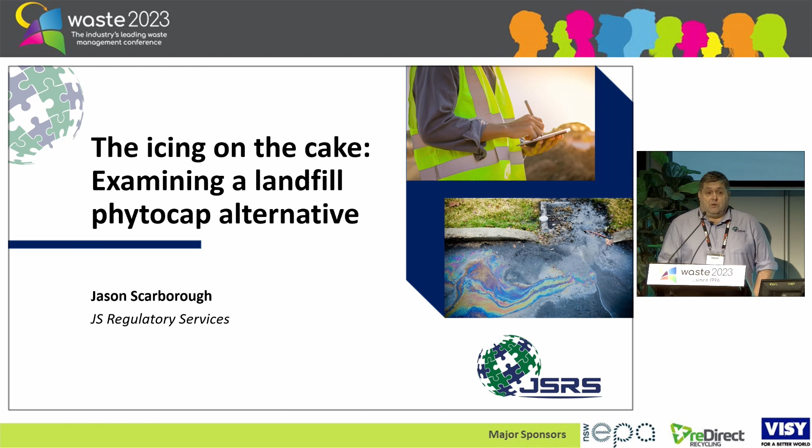There we go. All right, back to the business at hand. I'm talking about a phytocap trial that was undertaken with Mid-Western Regional Council. For those of you new to the game or wondering what the hell a cap is to begin with, let's start from first principles.

If we're talking about your average cross-section of a landfill, it sort of looks something like that. A lot of time and attention is often paid to the liner system. Then when the facility's about full, people go, holy crap, we've got to put something on top of this now. And there's usually a mad rush to design and finish off the landfill site while starting either a new cell or a new site.

Now, where it gets interesting: phytocap. Some of you might be thinking, a whooby whatty. Look, a phytocap is like what you would call a conventional cap, but it incorporates vegetation into the mechanism for its operation. It intercepts rainfall as it falls on the cap, and moisture gets sucked out of the cap underneath by the plants, and there's also water storage actually in the soil layer. So it operates by a slightly different principle compared to conventional caps.

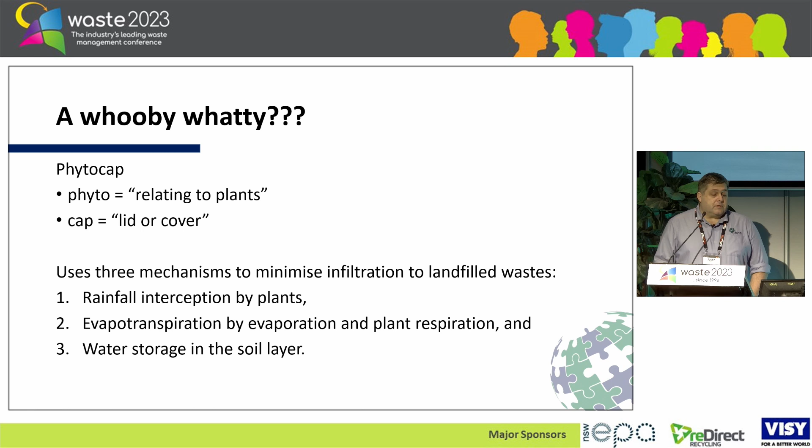If you put the two side by side, it looks something like this. If you follow the New South Wales landfill guidance, you end up with something that can have up to 7 layers of materials stacked on top of each other, so it can become quite a complex engineering undertaking. You put a phytocap next to it, that's pretty much it - 3 layers of stuff. So from a construction perspective straight away, you can see some advantages there. There's also some performance advantages, and operation and maintenance advantages as well. It definitely has merit when you stack them side by side to a conventional landfill cap.

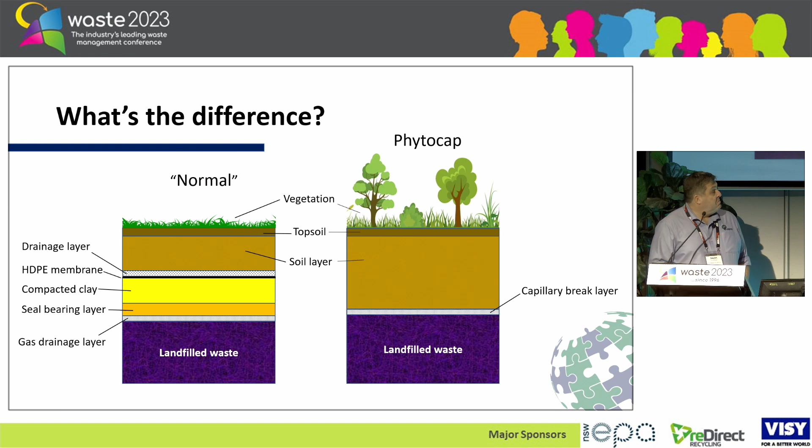So you're probably thinking, well, if they're so good, why aren't they everywhere? I've done some careful research into this topic, and I thought maybe the difference is in the 2 pathways to get approval for a normal cap versus a phytocap. If you're going down the road of getting approval for a normal cap, you go to the landfill guidelines, you go have a chat to some engineers, they come up with a design, you go to the EPA, and if they say okay, you build it. Sounds simple enough, but anyone that's been through that journey can tell you that can be arduous, that can be a tough road.

For a phytocap, I think this is where the difference lies as to why they're not everywhere.

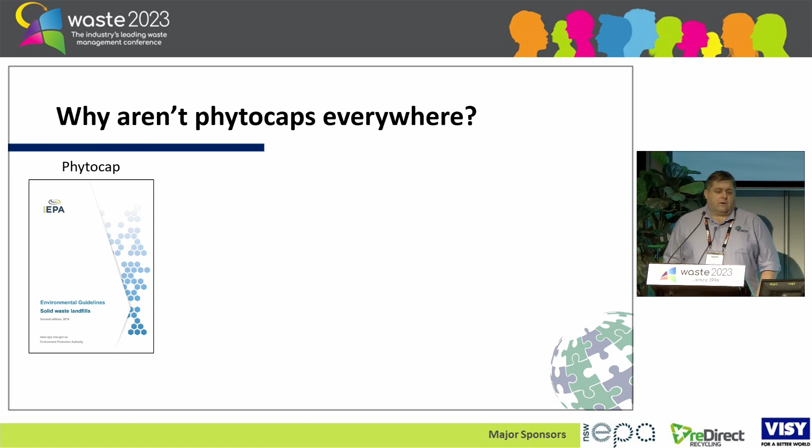You start in the landfill guidelines, good start, and they point you to another set of guidelines, which tell you to get a whole heap of data and feed that data into a computer model. Out of that computer model, you get a profile design. Then you go to the EPA and say, hey, we want to trial this profile design. They say, go away and trial that for 3 years. Then you go back into the computer with the trial results and ask, how did we go? Do we need to modify the design? Yes, we do. Okay, go back to the EPA with the trial results and a modified design. Then you go to the engineer and you can build it. I think that's why they're a little bit trickier to get off the ground. Just a hunch.

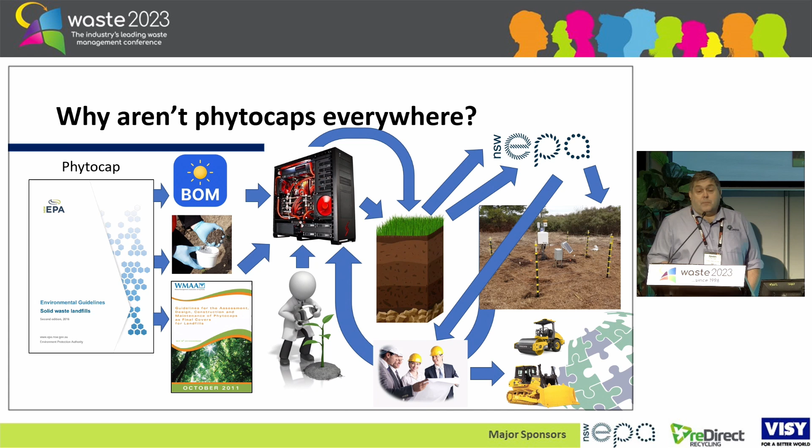But anyway, this is where Mid-Western Council comes into the picture here with the Mudgee Waste Facility. It's not a spectacularly unique regional waste facility, it's fairly typical for a mid to large size regional centre. They're looking to close off their landfill, and there are some challenges to building a conventional cap on this site.

So they said, hey, let's have a look at doing a phytocap.

We started off by having a look at the soil that's on site, and straight away we could tell, looking at the analysis of the soil, it's not suitable for a compacted clay liner, but it's potentially suitable for a phytocap, and they've got lots of it. They've got it coming out of their ears, so they're a bit fortunate for a regional waste facility. They've got quite a large amount of potentially suitable material.

Oh, and by the way, before monsters go to bed at night, they check under their bed for Chuck Norris. Sorry, there's so many good jokes, I just didn't want to waste them. Anyway.

Okay, so we started off the trial and said, okay, what goals do we need to set? We looked at 2 goals in particular. One is specified in the guidance, where it says that the infiltration through the cap has to be less than 5% of the annual rainfall. Those figures on the slide are about what we were looking at for this facility. The second, obviously the big one, is it less resource intensive than building a conventional cap? So those are the 2 things we needed to tick off to say this is worth looking at.

So then the next step in the process, we dived into the numerical modelling. In this case, I used a model called WAVES, developed by the CSIRO, very smart cookies there. It simulates the complex interactions between atmosphere, soil, and vegetation, but they need to do a bit of work on their user interface and user experience. It's DOS-based, can you believe that? It's 2023, guys. But it still provides credible results.

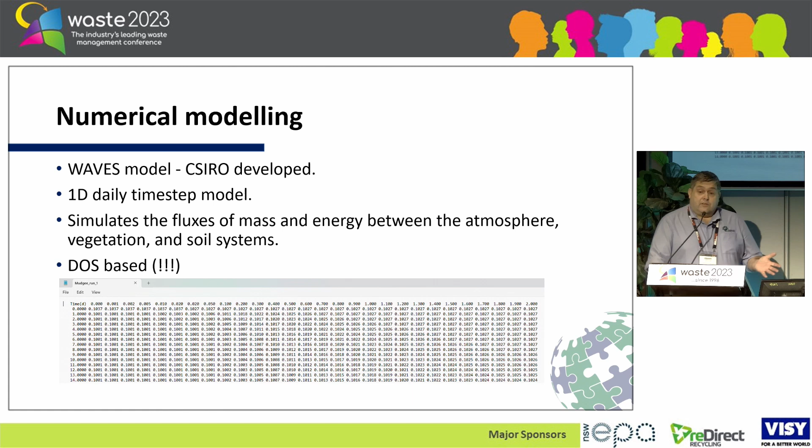Out of that numerical modelling, we got this. It was conservatively designed to work from day one, so it wasn't dependent upon the vegetation being established to actually operate effectively. In total, 1,600 millimetres of cap with 100 millimetres of what's called a capillary break, to stop moisture being sucked out of the waste mass into the actual phytocap.

So we did that, we went to the EPA and said, hey, what do you reckon? They said, yeah, go away and test it. And that's exactly what we did. We set up about a 1,200 square metre trial plot using that soil profile, put in soil moisture probes, put in lysimeters, put in an automated weather station, and because it's the 2020s, we put in a system that could be accessed online at any time to download the data, view the data, have alerts sent, and all the rest.

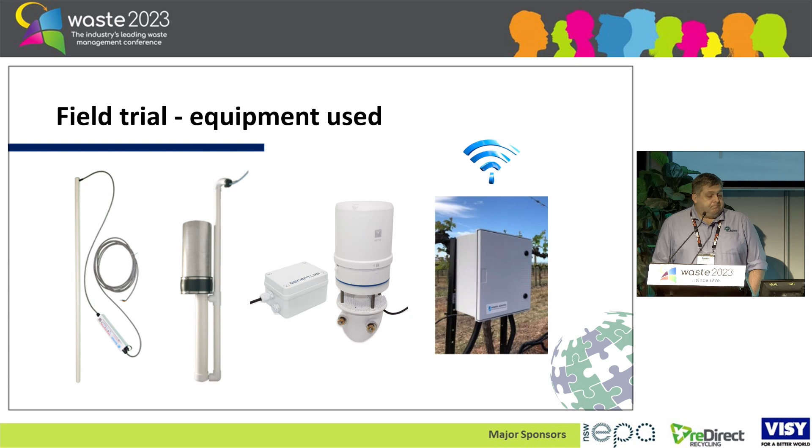And what did we measure? Well, essentially everything we could, because my philosophy is that you can never have too much data. So at the end of a 12-month period, there was over 3 million data points that we could look at. Now, don't worry, I'm not going to go through them one by one and bore you to tears, but I will pull out some of the significant findings, which I think are of specific relevance here.

We picked a good year to trial this. Apparently it was the 6th wettest 12 months since records began in Mudgee. So if we're going to give it a trial by, well, I was going to say trial by fire, trial by water, this was definitely it.

And in amongst that, there was about a 1 to 2% AEP storm, a 48-hour storm in the middle of that. So we put it through its paces, and there were some interesting findings, and these are the three I'll talk about primarily.

We noticed something called what I'm calling a moisture wobble in the soil profile. The response to that storm was actually quite surprising, and there was some inconsistency between the lysimeters and the moisture probes. So if I bring up the moisture profile first, we'll deal with that.

But we'll come back to that.

This is the storm event I was talking about, that quite intense storm event. Each data point is taken every 15 minutes, so you can see there was quite a lengthy period where there was 6, 10, 16 millimetres of rain falling every 15 minutes. The yellow line above it is the soil moisture at 0.75 metres below ground level, and you can see it increased by a whopping 0.7%. That was the furthest down the profile that this storm event impacted in the phytocap.

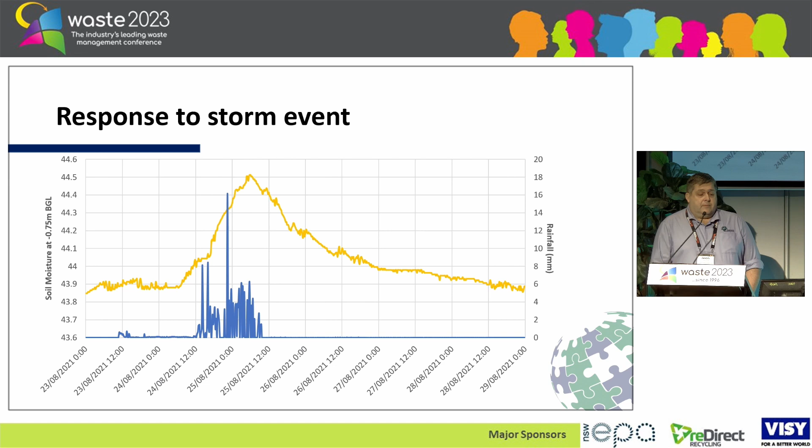And then having a look at the moisture probes, again lining up against rainfall events, there was very little variation in the actual soil moisture identified as well. So we're thinking, well, where's this water that's ending up in the lysimeter coming from if we can't see a progression through the soil profile?

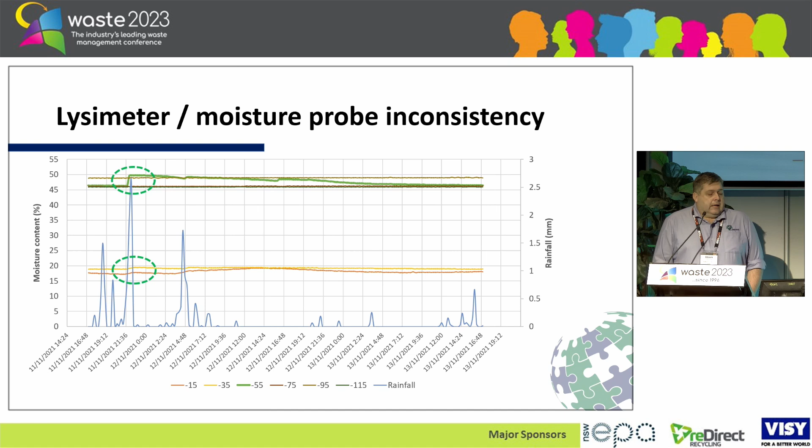So we got to an interesting situation where, if we just looked at the lysimeter data, it fails the first goal I mentioned before about achieving that infiltration. But if we just looked at the moisture probe data, it passed with flying colours. So there's this questionable relationship going on - we can't see that deep migration of moisture, that whopping great big storm event didn't penetrate the full depth of the cap, and then that moisture wobble I talked about. We thought, okay, something else is definitely happening here.

So this is where the benefit of lots of data can come in, because we're able to pull it apart and look at correlations between various things. And we've come up with a theory that we think might explain it, and it might have implications for future phytocap design as well.

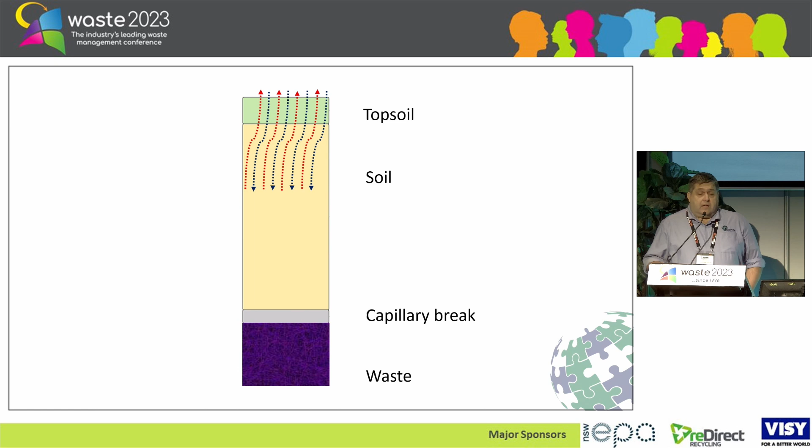So basically, this is the principle that phytocaps work on: water in, water out at the top. We can model that, we can measure that, not a problem. The thing is we've got this other process happening underneath, where organics in landfill waste are breaking down, and when they do that they obviously create landfill gas and heat. Again, delving into the data, looking at temperature down the profile, it's definitely getting hotter the further down we go. That makes sense.

So the theory being is that, if anyone's done landfill gas extraction before, they'll tell you that landfill gas comes out humid, quite saturated with water vapour. So we're thinking perhaps there's water vapour being conveyed from the waste into the bottom levels of the phytocap. Does that explain why it's coming out the other end?

Well, it sort of does, because when rain falls, the weight of the cap above it increases, because it obviously absorbs water, and that increases the vertical stress in that soil column, applying pressure, a bit like a sponge. Out it comes, okay?

So what we think the data is telling us is that there's this cycle going on at the bottom of the phytocap, round and round it goes. It's not new moisture, it's moisture coming out of the landfill waste, being squeezed out again, coming back up as water vapour.

So it might mean that the bottom couple of hundred millimetres of the phytocap shouldn't actually be factored into it working as a phytocap, because that layer could always be saturated from water vapour coming from the waste.

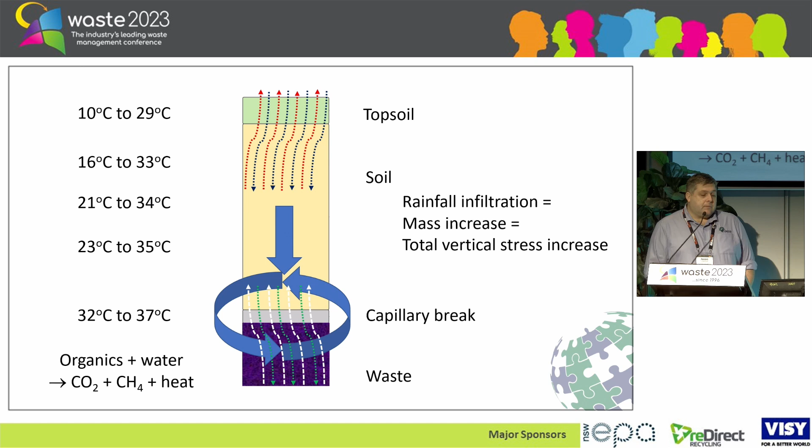Importantly, this isn't modelled. I've scoured everywhere to see if there's a model that could describe or attempt to replicate this process, and I haven't been able to find one. So there's a bit of an unknown in terms of how that bottom couple of hundred millimetres of a phytocap works.

So that's probably a good reason why you should be looking at conservative design.

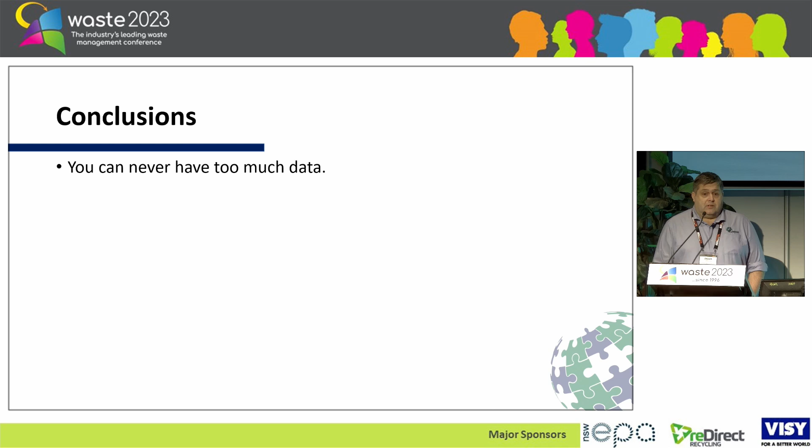Conclusions we came to at the end of the project: you can never have too much data, it's something I live by. If you can collect a couple more parameters at tighter time intervals, it's worth it. You can never have too much of it, and when you get apparently contradicting results, that's where it really comes into its own.

Phytocaps do need to be conservative to accommodate for that moisture flux at the bottom of the phytocap. You might have to discount the bottom couple of hundred millimetres from the action of how it actually works. Definitely more research is required as to what the effects of that are, and hopefully someone clever can come up with a model that might replicate that in some form.

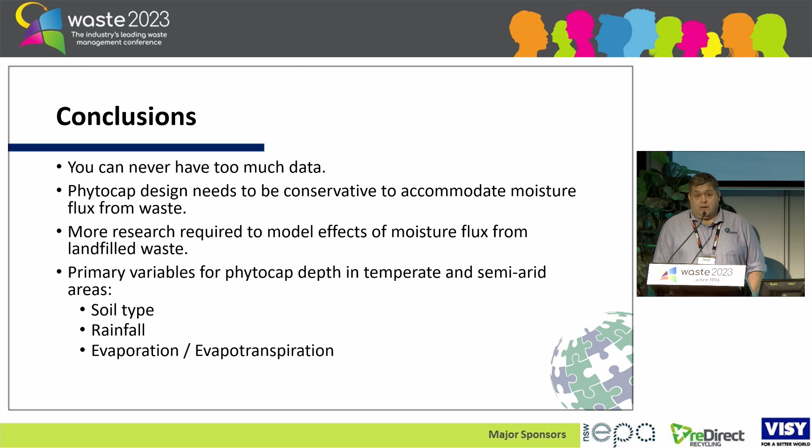And lastly, this is the message for everyone with an active landfill site in the room: if you've got the right soil type, the main variables you're looking at now for suitability of a phytocap are how much rainfall you're getting and how much evaporation or evapotranspiration you can get.

But that doesn't mean it can't work outside of those areas.

Looks like Chuck's having the last say. Well, yes, okay. That's it for me, thank you.

But I do want to acknowledge Mid-Western Regional Council, who were brave enough to go through that twisty, turny approvals path I showed before, and in particular Kylie Stewart and Amber Twin, who have been instrumental in getting this work done. Thank you.

Is it? Where was the hand?

So very much like the talk we've just had, this is different processes of landfills. I do like phytocaps, by the way, I'm going to say that, even though this is going to go against it a little bit.

This is about evolution of landfill. Just very quickly, a little bit about our company, if you don't know us. We're a lining company, we're a materials supplier. We have to source 99% of our materials from overseas because there's fundamentally no manufacturing in Australia anymore. Pretty sad, but it's a reality of what it is. There's only a couple of things made here.

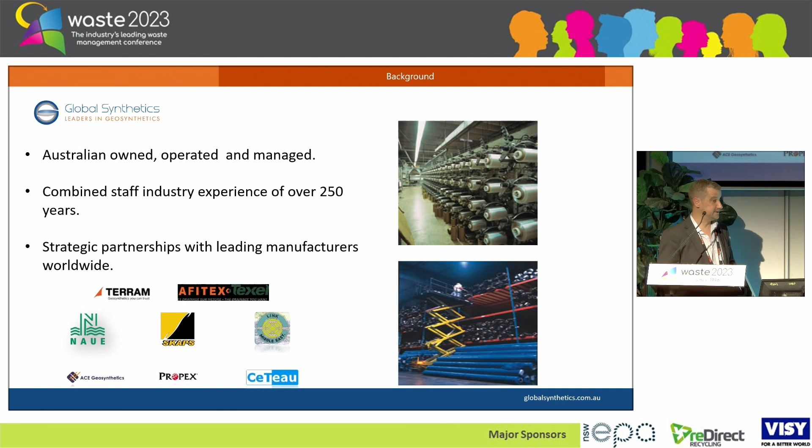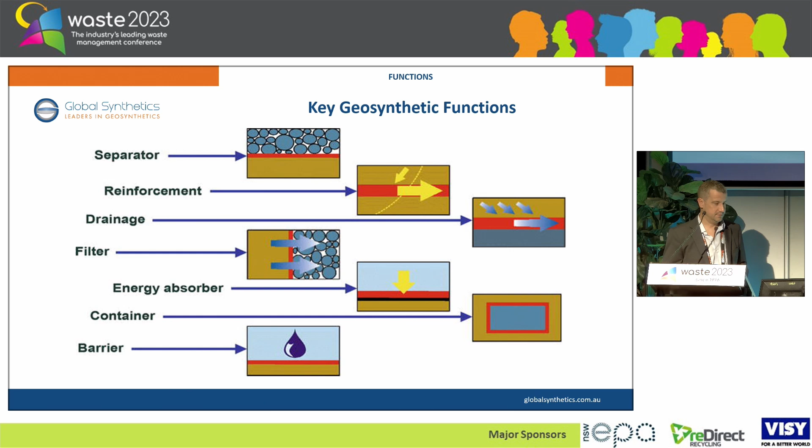And it's all geosynthetics. If you're not aware, geosynthetics is really broad. It goes into lots and lots of different things. You've got geotextiles, a lot of people know, HDPE liners, geosynthetic clay liners, but it goes way beyond into coastal erosion, all sorts. But as wide as it is, it all sits under these fundamental categories: it separates something, it reinforces it, provides drainage, filters, containment, which is a big thing in landfill, and barriers. And this gives you a snapshot of all the different applications we go into.

So, the matter at hand, landfill. Back in around about the 1800s, waste was just chucked on the side of the road. It was put anywhere, did whatever you want. But it was actually recycled - scavengers used to pick it up, recycle it, and do everything with it. Was it the best idea? No, but it was a reality of what they were doing.

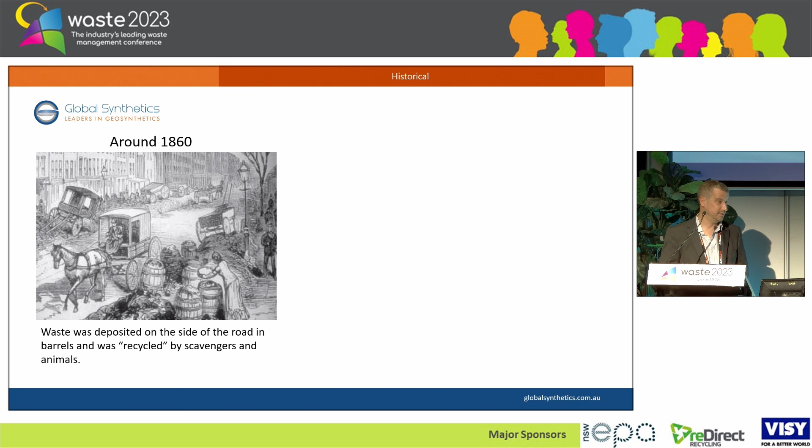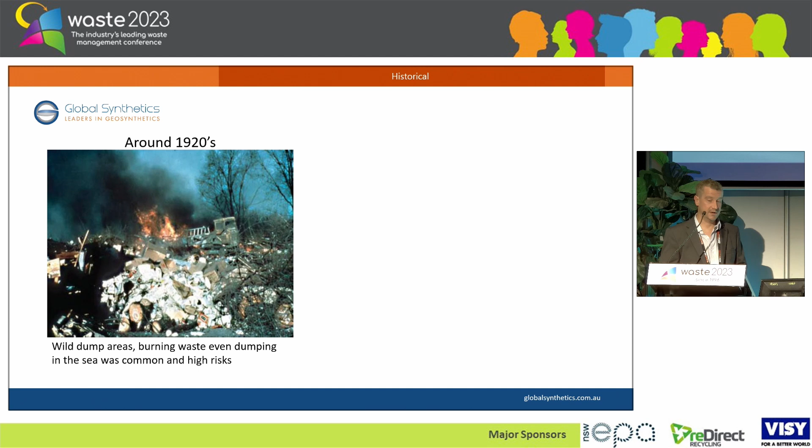And then around about the end of the 19th century, they realised actually there's a bit of a health and safety issue with this. People were getting poisoned and there's lots of contaminants and everything going on. So they started to actually try and pick it up and dispose of it. However, what started to happen is in around about the 1920s, all these landfill sites or these areas that they were dumping the waste weren't being controlled. So getting lots of fires, or it was getting washed into the sea or the drinking water, the groundwater, so people were getting poisoned on the back of all of that.

So around about the 1980s, they started to engineer landfill sites. They started to actually control where the waste went. They started to control how it was disposed and actually make sure it didn't leak into the ground.

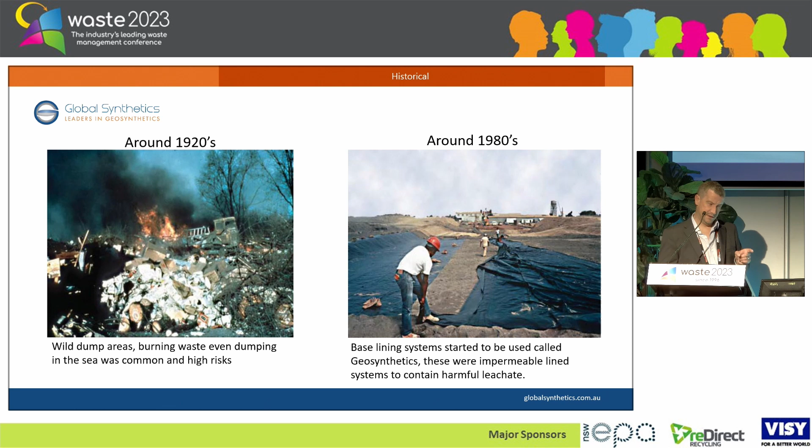And this is an interesting point, especially for a conference like this. In that point in the 1980s, all those polymers that we used were recycled polymers. So your HDPE, which is your geomembrane basis - these are all petrochemical-based materials - recycled. Your geotextile protectant was recycled. Everything was recycled-based polymers. But what this research showed is all the chemicals that were going into that waste, like your chloroforms and that, were actually getting through the membrane system. So while they were trying to build it correctly, they were trying to do everything right, it still wasn't working. It was going into the groundwater and it was poisoning people.

I won't name the site, but 10, 12 years ago in Melbourne, they actually had an issue where a landfill site did leak. It did get into drinking water. It did poison people. And ironically, there was no lining in that system at all. And that was only 10 years ago.

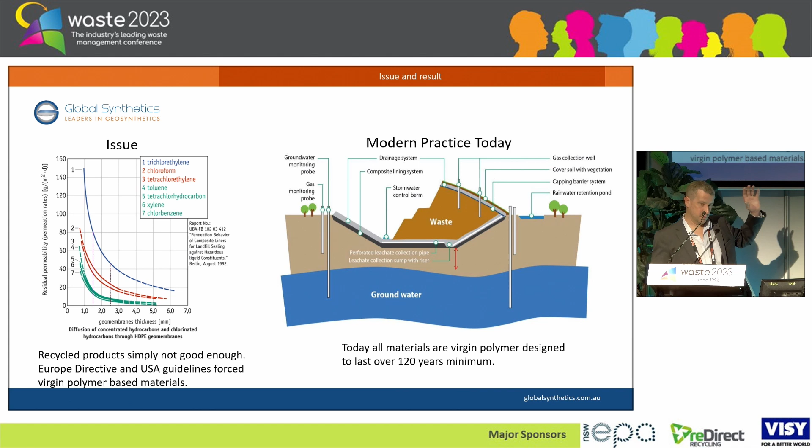So you've got a lining system, you've got a secondary lining system, possibly a third, which is a compacted clay. Not very easy to build, but it's part of it. And then they cap it all off and they close it. But the big thing that shifted was everything had to be virgin polymer, because under BPEM guidelines of Victoria and various other regulations, they want a minimum of 120 years, and no manufacturer, designer, will put their hand up and sign off on 120 years with recycled polymer. And I agree with that because it's very hard to control it.

Europe was probably the leader in this, though it's arguable between Europe and America who went first on this regulation. Around the back end of 1999, roughly 2000, this European Council directive came out. What it said was, if it's recycled, you can only warrant it for 5 years - end of story, a blanket rule across the board. So all these recycled polymers overnight were thrown out and had to be changed to virgin material, which increased the cost by 45%. Asset owners suddenly had to find another 45% worth of budget to build their sites - it was an instantaneous impact.

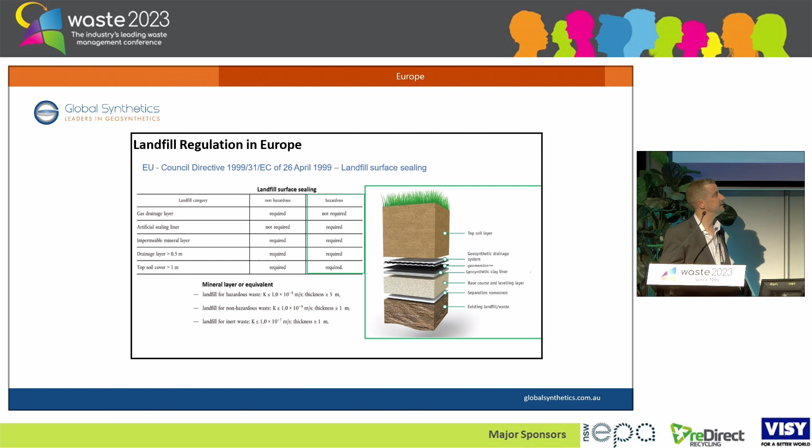That was Europe. This product here was one of the biggest impacted - known as a drainage net. It collects water or gas and takes it to its designated drainage point. They were all recycled, and all of a sudden they had to change. What they were doing, on the top right - not the best picture - was putting drainage stone up the sidewall of a landfill site to catch the leachate and drain it down, as their way of controlling and separating leachate from the waste. This net was actually a replacement for the stone.

But even today in Australia, only some landfill sites adopt this. Other ones still put stone up the side, which to me is crazy, and it's impossible to build because you've got to do a terrace structure to actually build it - very difficult. Again, it was the recycled versus virgin issue which caused this transition. That's just an idea of what it looks like - it's on a roll, easy, quick and very efficient.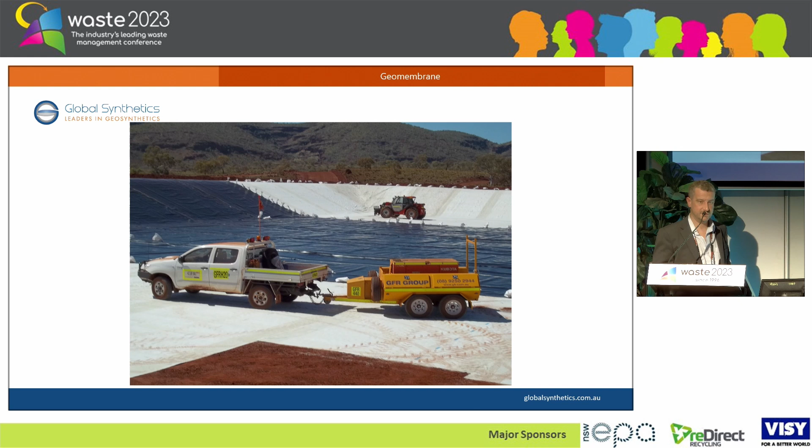Now we move on to the next evolution, which was a geosynthetic clay liner. They take a non-woven geotextile on either side and put bentonite clay in between those two layers in a powdered form. When it gets installed, it gets hydrated from the groundwater underneath it, swells, solidifies, and becomes an impermeable barrier. It naturally rehydrates from the groundwater and moisture. Same on the cap - you can do it from groundwater or the moisture from the waste, as we talked about in the phytocap session, the moisture coming out in the gas. So it's another impermeable layer.

So what that meant when you came to these designs is taking the traditional, conventional landfill on the left, transitioning it to the right. You could have your waste, your levelling layer. You've got a drainage net underneath to collect your gas and get it to a designated point. Your GCL is actually doing all the impermeable work. And then you put a net on top as well to control your surface water runoff, and you can take it off to designated points. That's important because if you have a shallow cap and water sits on top for too long, it puts undue pressure on your cap and can put stress and strain on the whole structure of the system. So you need to control your drainage and your water.

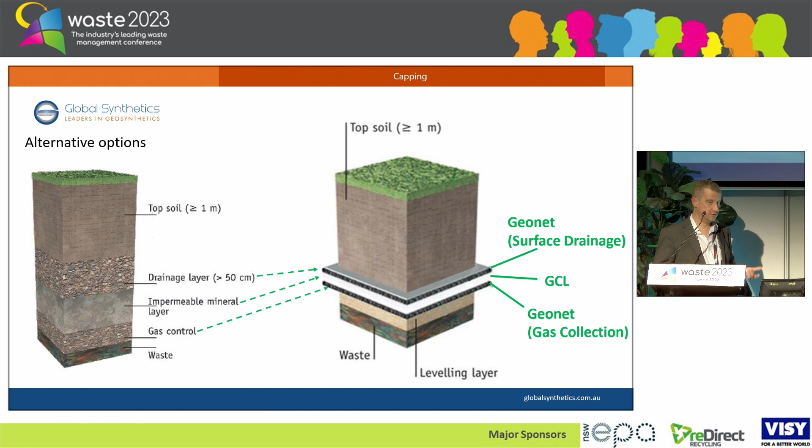Why that comes in is compacted clay, as we say, is harder and harder to source. And it's harder to get it to a permeability level of 10 to the minus 9. That's a guideline they have to achieve. And a lot of the times they're getting to -7, they get a -8, but they can't hit that -9 figure. It's really hard. And as you said as well, Jason, trying to build a compacted clay liner on a one-on-one batter is bloody impossible, to be honest. So by introducing all of these geosynthetic clay liners in a controlled form, one, you can build it, but two, you're actually reducing your carbon emissions by more than 50%. Massive, massive reductions there.

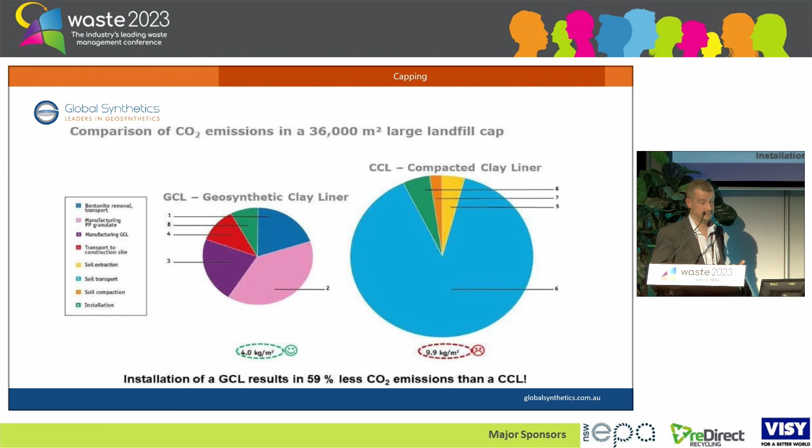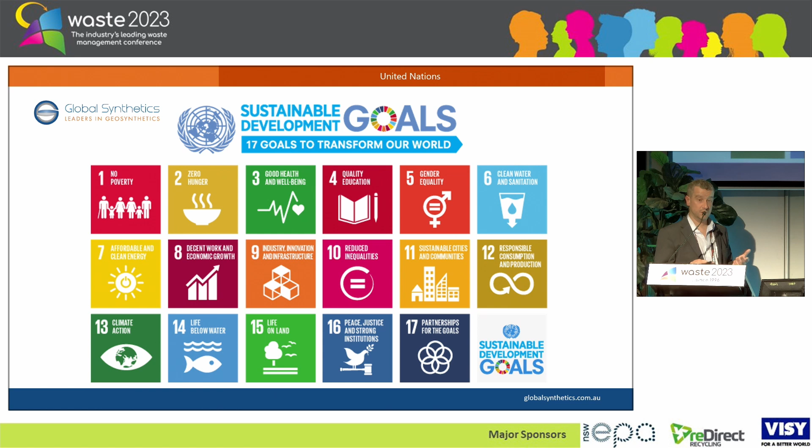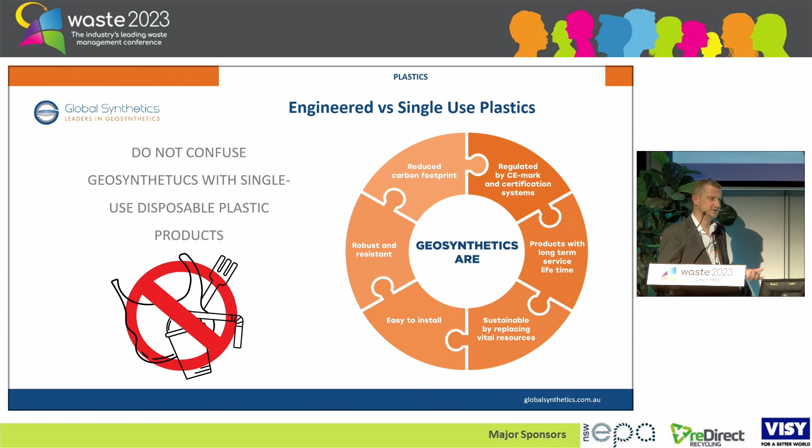I bring all that up because the United Nations, and I'm sure a lot of people are very aware, have got their 17 key goals that they're all working towards. And our industry is known as a geosynthetic industry, and it's a worldwide industry. So on the back of those 17 goals, the IGS, geosynthetic industry, looked at all of them and said, okay, as an industry, what can we do to actually help with the United Nations goals? And there's a lot of misconception because it is petroleum-based, there are plastics involved, so it can be a bit contentious. But one of the biggest things we find is we get mixed up with single-use plastics, which is microplastics going in the ocean, very big topic these days, and rightly so, versus an engineered plastic that lasts for 120 years and doesn't break down. So that's one thing we keep getting pigeonholed into, which is probably not really very accurate and very correct.

But it does a lot of other stuff. So water quality is a big thing that geosynthetics can do, and this again is landfill and the side of landfill. Wastewater treatment plants, big component of this. But this slide, this is the one I really quite like, and this is all about microplastics. I'm struggling to see the data, but when the landfill site is built correctly, controlled correctly, and actually disposed correctly, their estimate, which is 5 years old now, is 129 million metric tons of plastic was controlled and stopped going into wastewater and everything else. So if they're built correctly and done correctly, they're actually doing a good job. I know everyone wants to get away from landfill, but that's just a reality. It is doing a good job. Their estimate by 2040 is it's going to go up significantly, and it's actually going to tip the other way. There's going to be more microplastics in the water than there is in landfill because people just aren't controlling it and doing it correctly.

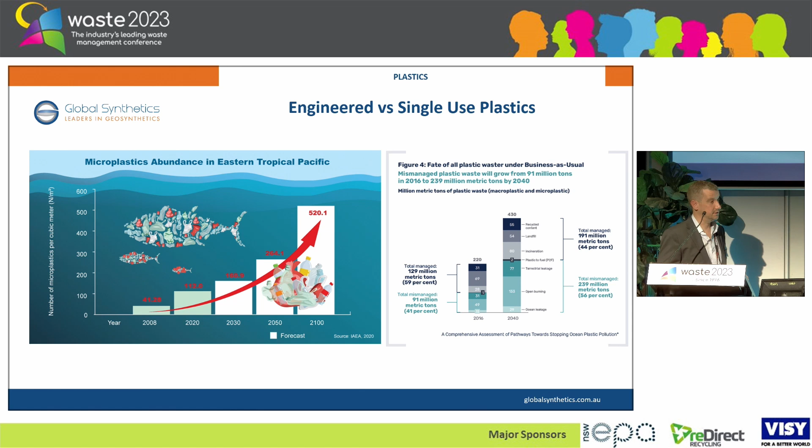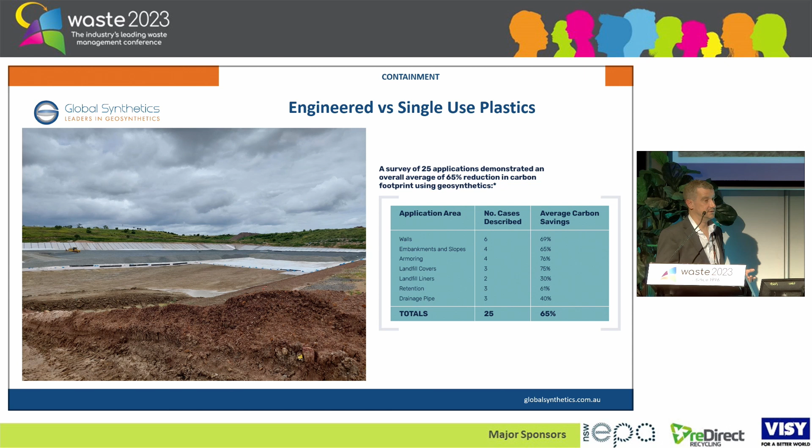We talked about carbon in there, so landfill cap's a big one. You're trying to do compacted clay liners and using natural resources. The carbon emission offset of using geosynthetics is 75% in a cap. So it's a massive, massive saving in terms of carbon going into the environment.

In Europe today, they've knocked that down to 250 mils worth of aggregate, using geosynthetics to replace the drainage capacity of the aggregate. That's Europeans' best practice now. The UK, now that it's left Europe, has changed and gone down to 175 mil. And America's approximately 270. But Australia is still 500 mil - that's what they're still doing today. Or 300 and sometimes, yeah, it varies from state to state.

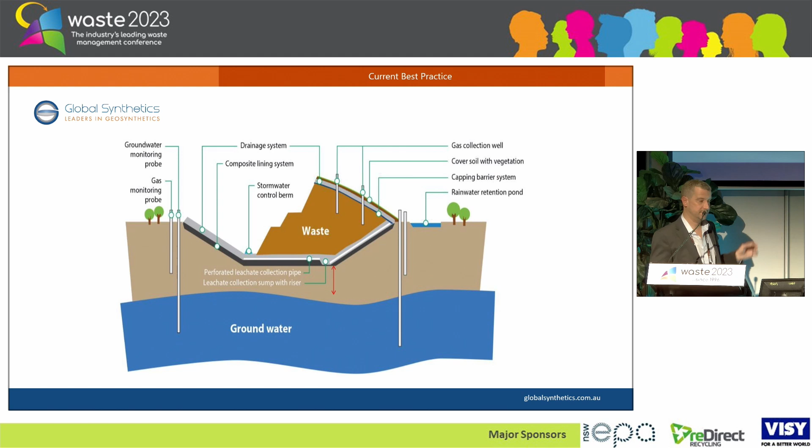So the big thing is, and a lot of people know this, is extracting the gas and converting it into energy. Big, big thing. That's an example of what they look like when they're set up. So a lot of the infrastructure is actually already there when they build the site - it's not a big investment to take it further forward. And this is what it looks like. They can turn it into fuel, they can turn it into energy, they can do all sorts of stuff with this gas.

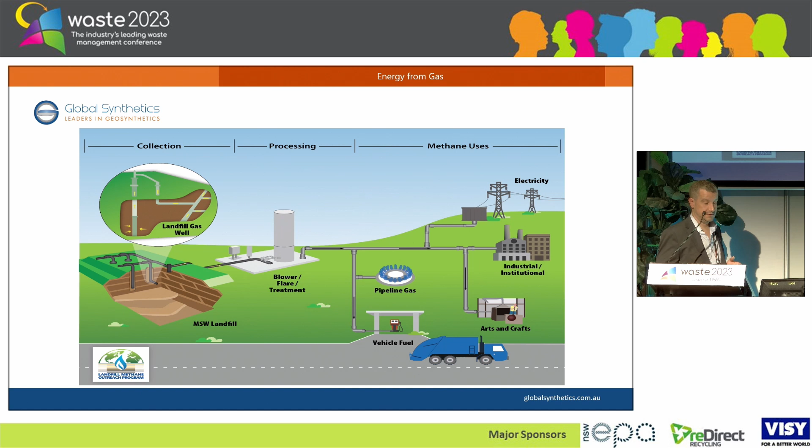So that's a real shame and a real missed opportunity, in my view.

Another one which is becoming more common - I'd say Canada probably led the way on this - is actually turning old or closed landfill sites into solar farms. Canada really, really pushed the barrow on this one. And when I think about Australia and the amount of daylight hours and sunshine hours you have in this country compared to, say, the Europeans - massive, massive missed opportunity.

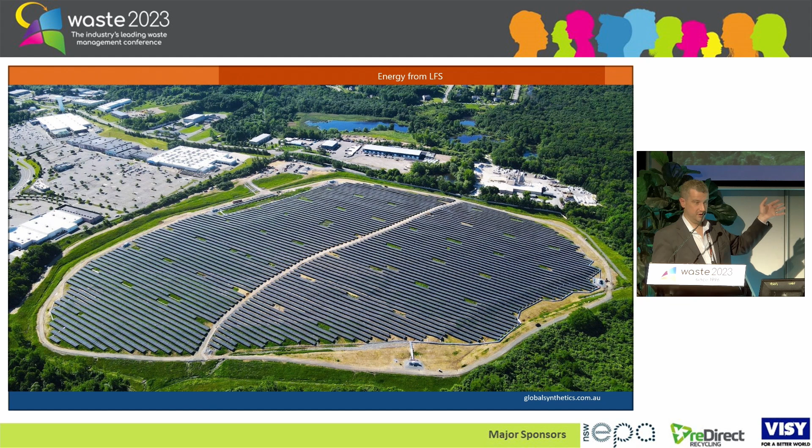I was speaking to one consultant the other day and he was talking about how a council wanted to turn an old landfill site into a sporting centre - netball courts, soccer fields, and so forth. The cost of doing that to reinforce it was absolutely ludicrous, and he desperately tried to talk them out of doing the structure, but they refused. That's what they wanted - their sports precinct. So the money involved was crazy compared to the usage and what they were going to get out. Whereas if they'd done solar, free energy, reduced energy bill, reduced energy costs, significant savings. And that's the process, that's kind of what it looks like.

So landfill sites have moved on a lot. The phytocaps is something I've always been quite interested in watching because I do think it's a good evolution. I do think it should go forward and be pushed and encouraged. I know there's controls and concerns, but I do think it's the next step as well.

But the bottom line is, we have floods, we have disasters, we have fires - we all know these pictures from last year and two years ago. While as much as we want to, we can't get away from landfill sites - you just can't. In the next 20 years, to try and get down to zero waste, I think is virtually impossible. I just don't think it can be done. Only Belgium is the only country I'm aware that ever did it, and they sent their waste off to Germany or they set fire to it. That's how Belgium did it.

So you are going to need them. So the question is, can you evolve and get better use out of them? And can we revert back to a recycled-based polymer? And will designers take the risk, or will the manufacturers take the risk? It's an interesting question. Hopefully they can, but it's an open one.

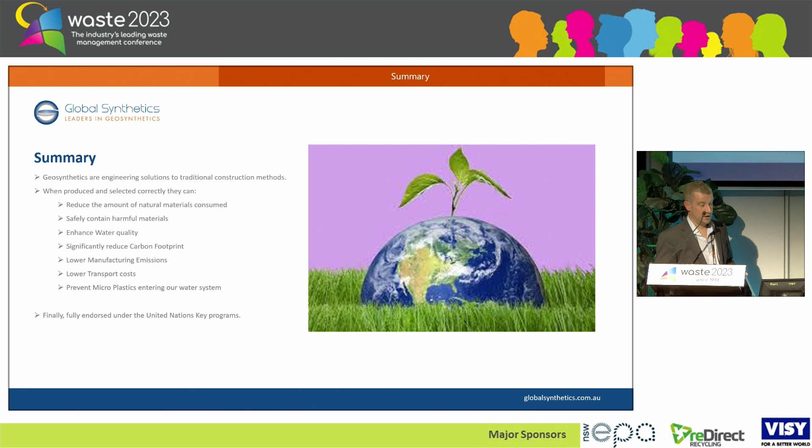So the bottom line is geosynthetics are contentious. They are not the best, but they do a lot more good than people probably realise. And that's me in a nutshell.

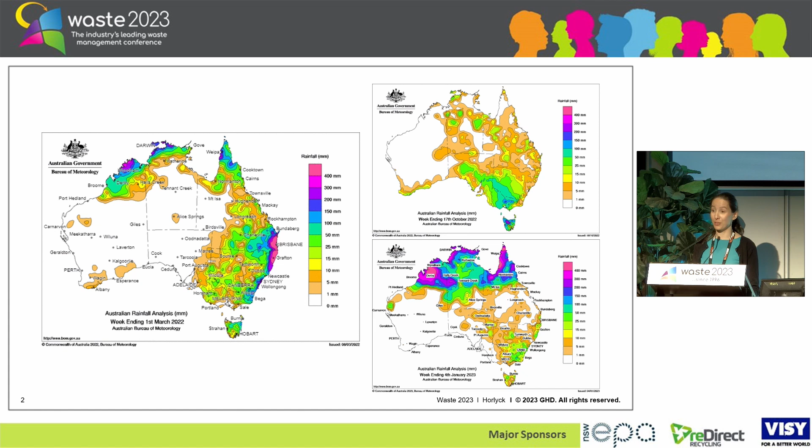So much of the east and north coast of Australia experienced significant flooding, and our landfills obviously weren't immune to these impacts of prolonged wet weather and extreme events.

So back to basics. What do we consider when we look at a landfill and how it generates leachate? Well, the first most obvious one, we get rainfall. It infiltrates through our cap and cover material into our waste, and number 1, landfill leachate generation.

But with incoming waste being more wet, we're probably not seeing as much absorption of water into that waste as we would usually see. So the waste mass is not absorbing the water, we're getting more volume of water, of leachate, out through the bottom of our waste mass.

On top of that, in extreme rainfall events, surface water diversion infrastructure can become overwhelmed with the amount of water that's running towards landfill sites. And in extended wet periods and saturated ground conditions, the proportion of water running off is even higher than what you would usually expect to see.

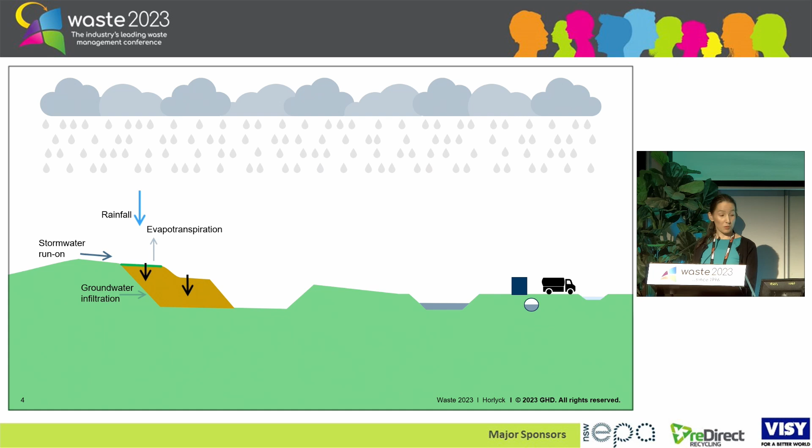With more rainfall, we get more groundwater, potentially more groundwater infiltration into our landfills, and potentially lower levels of evapotranspiration, which Jason was talking about earlier, is a really important component of taking water out of especially vegetated landfill cap systems. So all of a sudden we're getting a lot of water into our

leachate collection systems and subsequently into our storage ponds, or whatever our other storage systems are. But when we get more rainfall, we've got more rainfall into our ponds and less evaporation from our ponds, so our ponds are filling up even further.

Some of our site's usual disposal mechanisms, irrigation or recirculation back into our waste, isn't working because our landfills are already wet. Our on-site treatment plants might be working all right, but sewer systems might be full and you can't discharge into those, or off-site disposal by tankers into sewage treatment plants might not be available. So all of these together can leave a site at really high risk of regulatory non-compliance, environmental contamination and unplanned financial liability. And the situation's not looking very good.

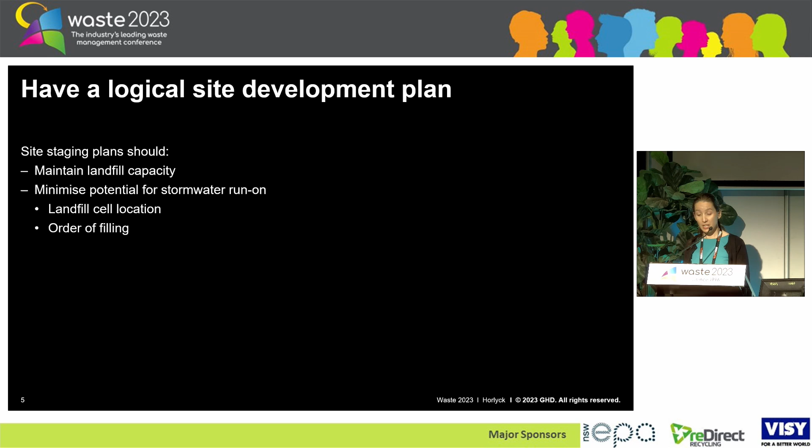So what can we do to prevent these issues happening at our sites in the future? First and foremost, sites need to have a good site development plan. We need to plan for these things. A good site plan should consider, first and foremost, keeping landfill site open, but looking at the site arrangement to make sure that the location of future landfill areas and the order of landfilling those cells consider the surrounding topography and the proposed waste filling levels to reduce or even avoid altogether the potential for surface water run-on. It also needs to consider optimisation of the active area footprint sizes and reduction of the high infiltration interim capped areas and maximisation of low infiltration final capped areas.

So now we have a good plan. It can save a lot of pain in the future.

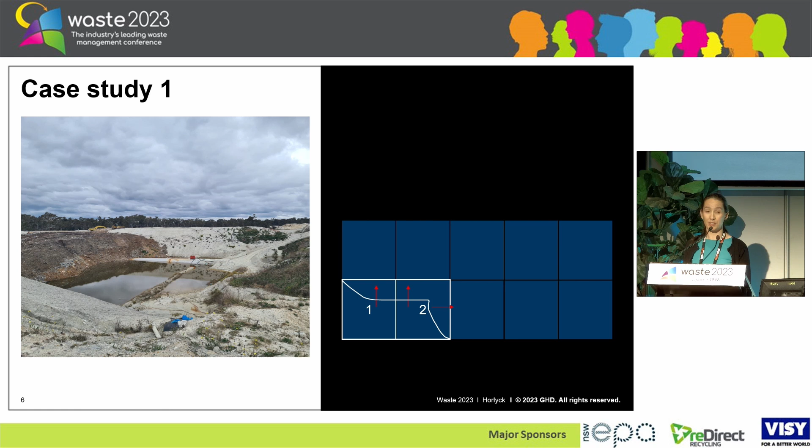Now, just as a quick example, example site, cell number 1 and 2 - this is a little plan diagram I've got here in the bottom right. So cells 1 and 2 are constructed indicatively as shown on this plan, with the base of the cells being about 10 metres below surrounding ground level, pretty normal for now. We had interim fill batters where the surface water flow flowed in the directions as shown on the red arrows. Now, for some reason, the next cell that was constructed was cell number 3.

I can see Jason shaking his head. Not really sure what they were thinking, but I guess this is a story about the importance of thinking ahead and looking at the landfill as a system. So now all the surface water from these 3 constructed cells was flowing into the next cell, cell number 4. Now this cell accepts relatively small volumes of waste, so all of a sudden all this surface water was running into an area which, when they developed cell 4, was generating leachate. And all of a sudden this poor operator was dealing with a lot more leachate than they needed to during wet weather events, because of this giant catchment area all flowing into an exposed leachate collection system.

Oh, there's the leachate.

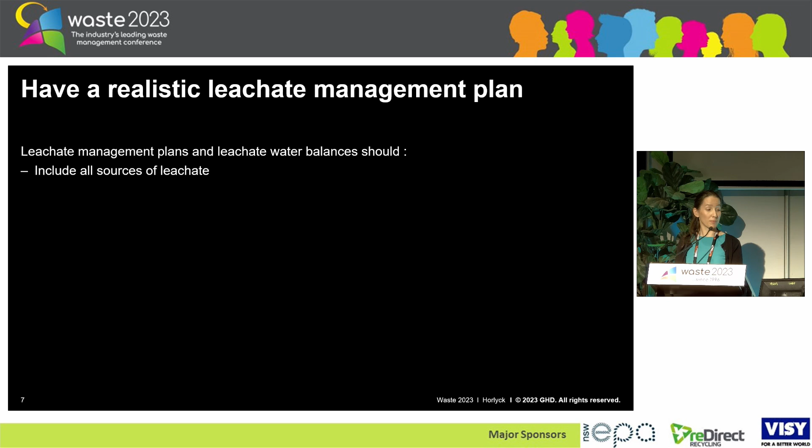So hand in hand with having a good staging plan is having a realistic leachate management plan. When dealing with leachate management plans and leachate water balance models, we need to consider all the sources of leachate on a site, which may include contaminated stormwater from catchment areas running into leachate collection systems. It needs to consider the current site arrangement, but also future site arrangements, in relation to that staging idea we've already talked about. And then we need to have realistic storage and disposal options - I'll talk about that a bit more.

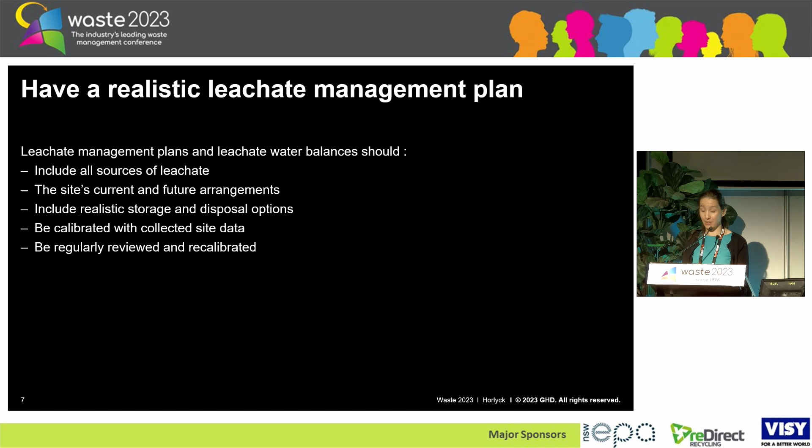It needs to be calibrated with site collected data. There's no point having a model that doesn't actually reflect your site. And it needs to be regularly reviewed and recalibrated as new data becomes available over time.

A good, realistic site water balance model will be able to highlight periods of time when more treatment and disposal capacity is required, where improvements can be made, and where to best invest improvements. For older sites in particular, improvements in final cap designs can have a significant reduction in leachate generation and ongoing capital and operational expenditure. It will also identify stages in the site's development which will be more prone to requiring contingency leachate management measures.

But as I said, a model is just a model, and as they say, rubbish in, rubbish out. So the key is really having good site data - the more site data available, the more certainty there is about the site's future performance and how it's performing as time goes on. So we use that historical data to calibrate the model, to understand what happened in the past, and use that to extrapolate what might happen in the future.

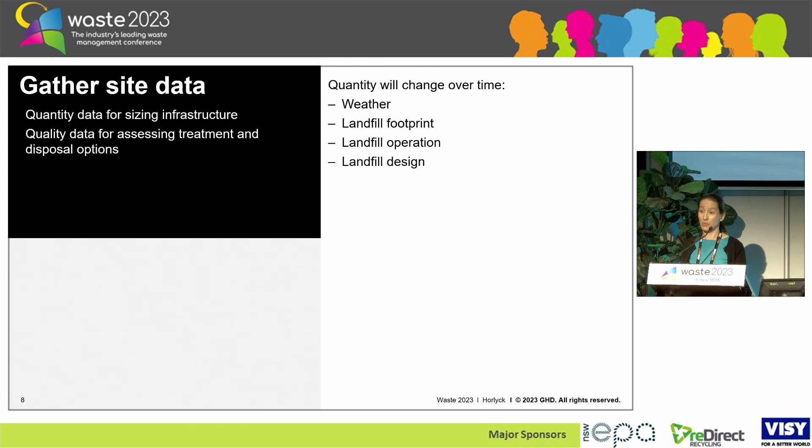When considering sizing new infrastructure, it's important to consider that the quantities of leachate will change over time, depending on the weather, the operational footprint, and how the site is operated and designed. When thinking about leachate treatment and disposal options, the quality of the leachate then comes into play. And that will change over time too, depending on the type of waste you have and how old that waste is.

So just to quickly illustrate the value of a thorough leachate management plan and a well-developed site staging plan, this is an example of a flow diagram we use to inform a leachate water balance. Now, this is obviously a large, relatively complex system - most sites wouldn't have a system this complex. But we have lots of sources coming into lots of storage options, and we had to consider all of these sources and storages because they all feed into one leachate treatment plant and one sewer discharge point.

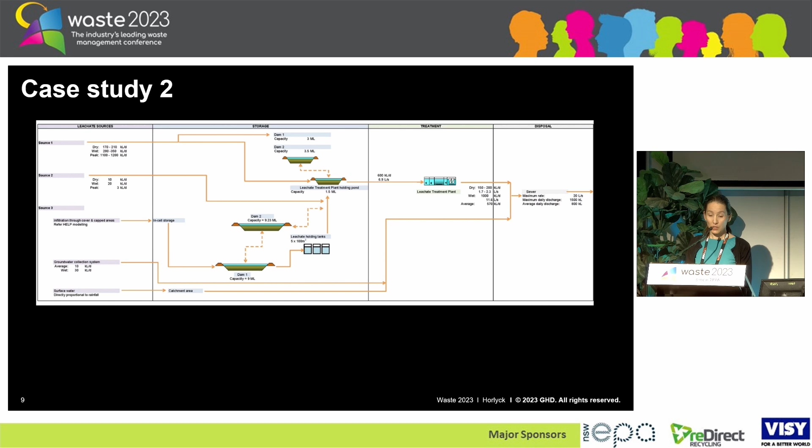So we had limited site weather data for this site, a relatively small amount, but by undertaking a comparison of that data with Bureau of Meteorology data, and scaling the data a bit, we were able to give ourselves a longer range of historical weather patterns to consider. We then used a commonly used program for this kind of thing, called the Hydraulic Evaluation of Landfill Performance, otherwise known as HELP, to quantify leachate infiltration through a range of current and future proposed cover and capping profiles.

We also had to consider the surface water and groundwater collection system contributions where they were relevant to leachate, surface water, and sewer discharge. We were then able to compare all these results with the site data to get a really good fit for the site, making sure the model we developed was calibrated for the site itself, and extrapolate that to future site arrangements and future potential climatic conditions.

The modelling did identify that the management measures in place at the time weren't going to be sufficient for the future predicted volumes. We could then consider a range of options for how that might be managed into the future, such as reducing the uncapped area, open areas, and cap improvements, increasing the treatment plant capacity size, having additional discharge volumes into the sewer, and also having in-cell storage of leachate during extreme weather conditions. Because we had such a good model, we could stress test a combination of these measures.

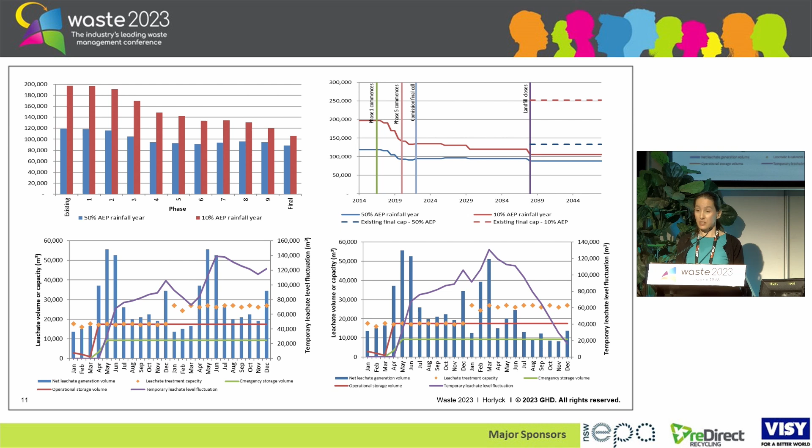The other upside of this process is it ensured we didn't recommend expenditure on unnecessary infrastructure. In this particular case, there was enough storage capacity on the site, and a new stormwater pond or leachate pond wasn't actually going to help the situation. It allowed the owner to plan for future upgrades well before they were required, and we've recalibrated this model a number of times since based on new site data to see how it's tracking, and so far so good.

On the other hand, we've had a couple of sites we've heard of in the last couple of years with large uncapped areas and some surface water separation issues, with both sites relying on evaporation and irrigation for disposal.

Their site management plans relied on tankering the leachate in emergency situations, but due to the wet weather, the treatment plant wouldn't accept those tankers in those wet weather events. So to manage the situation at these sites, they had to fast-track the design and construction of additional leachate storage ponds, which had to be done quickly and at high cost, and probably more importantly, an unexpected and unplanned cost.

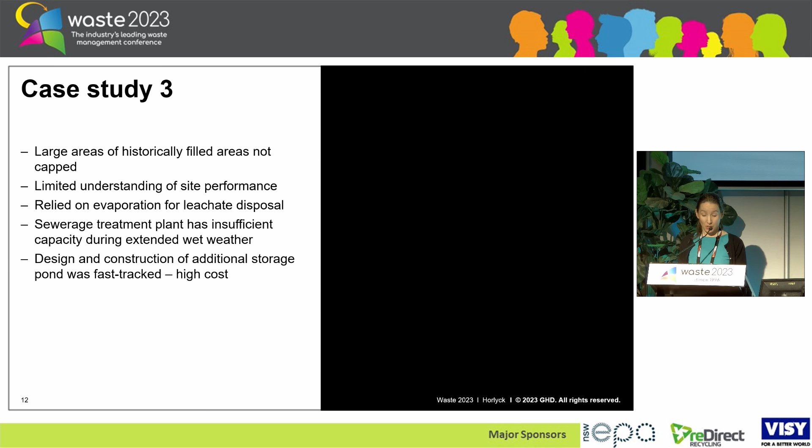This really highlights the importance of contingencies that are reliable and practical for the site. Leachate treatment plants, or sewage treatment plants, might be impractically far away. Tanker trucks might not be available, the treatment plant might be closed or offline. If there's a floodplain between you, the landfill site, and the sewage treatment plant, you might not actually be able to get there.

Now, these are pretty extreme situations and aren't likely to be the case for most sites, but if they are, it would be potentially environmentally and financially catastrophic.

So once you have a good plan in place, it's time to implement the plan and keep to the plan. Good site management practices will reduce leachate generation through infiltration by reducing active tip face areas and inspecting and repairing cover and capped areas to maintain those areas of low infiltration where you have them.

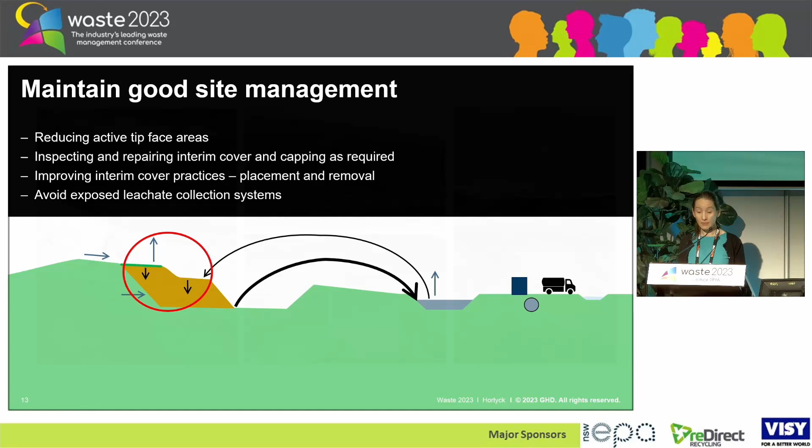A few sites we've seen have been experiencing significant leachate seepage from batters in these extreme and extended weather events, which has impacted the surrounding surface water. So now we're not only dealing with typical landfill leachate, we're also talking about contaminated surface water as well.

In terms of managing this, removal of low permeability cover soil materials as landfill levels are being raised can help prevent this happening into the future, allowing the leachate to flow more freely through the waste mass and into the leachate collection system.

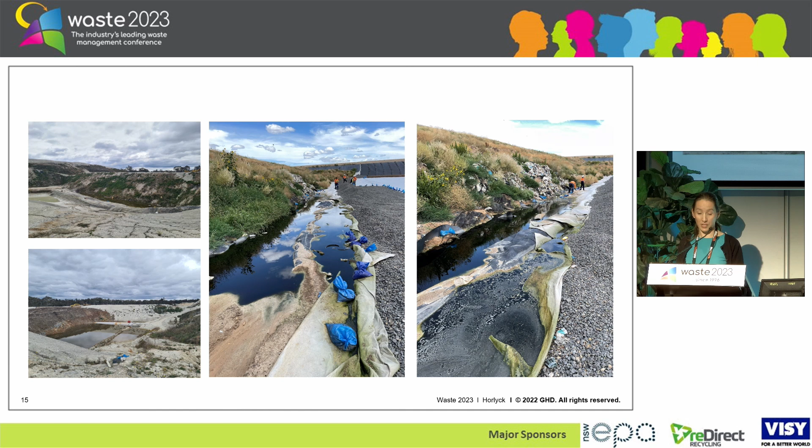Exposed leachate collection systems are also prone to overflowing in high rainfall events because they're just not designed to deal with large volumes of water in a short amount of time, and 100% of rainfall that falls on these areas is then leachate, rather than a proportion, which is typical for the rest of the footprint area of a landfill cell. So try to avoid it.

Good management of the site's surface water management systems is also important for leachate management. We want to make sure we've got good surface water diversion systems upstream and also leachate containment systems on the downstream sides.

Suitably sized and lined bunds, drains, and ponds to maintain separation of stormwater and leachate in large storm events. And please empty sediment ponds within the design management period. If your pond is full of water, it's not containing anything else.

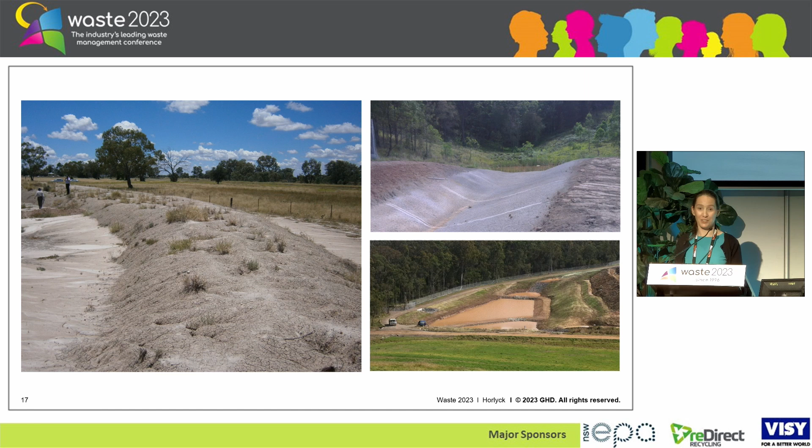The next component of good management is the leachate transfer, storage and disposal infrastructure. It needs to be properly maintained. We want to make sure pumps are working and are the right size for when you need them. Having remote controls, alarms and instrumentation can help you understand what's happening on your site at any time and how it's responding to changing weather conditions.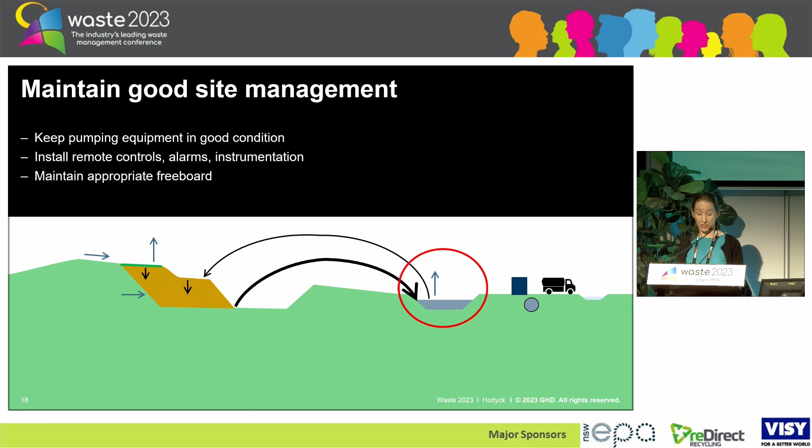Leachate ponds are designed with a design freeboard - a space between the storage volume and the top of your pond to maintain capacity to hold rainfall water in large storm events. This needs to be maintained as empty to contain those large rainfall events. Having a visible marker on the design storage depth on site can help staff see the operational storage limit to ensure capacity to contain large storm events.

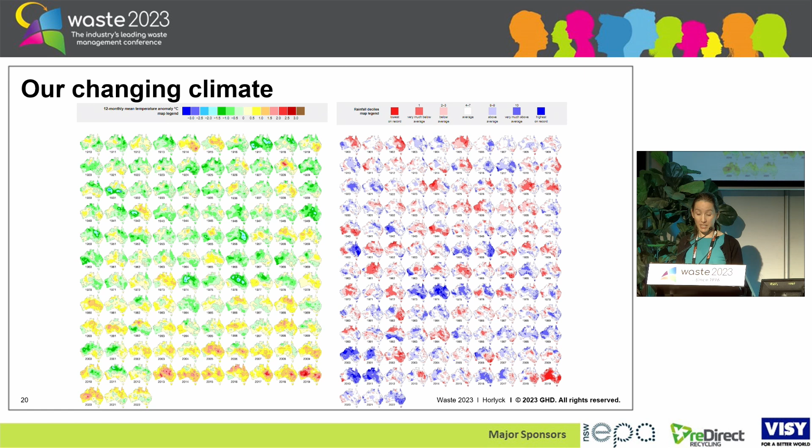So I've spoken a lot here about planning and simulating future site arrangements, but our temperature is going up. Rainfall patterns have been undergoing significant change in recent decades. While it's important to note that climate variability is inherent in our climate, there are long-term trends emerging.

According to CSIRO's 2022 State of the Climate report, rainfall is decreasing across the southern parts of Australia and increasing across much of the northern parts of Australia. But most importantly, heavy rainfall events are becoming more intense, and the intensity of these short duration extreme rainfall events has increased by around 10% or more in recent decades, with larger increases typically observed across the north of the country.

The warming climate can cause increased likelihood of heavy rainfall events, with warmer air holding more water. And even when average rainfall is expected to decrease, these extreme rainfall events are expected to increase.

Australian Rainfall and Runoff, which is the national guideline document for design storm events, published a guide in 2019 for extreme rainfall events to provide some indication of the magnitude of these impacts. Work is being done across many jurisdictions to understand seasonality changes as well, which is probably more important for landfill operators and designers in understanding the impacts of climate change on the design of systems on sites.

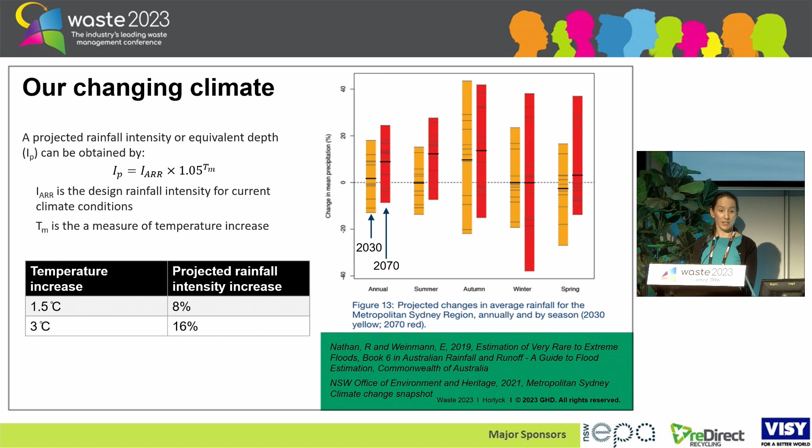At GHD, we've been working with our clients to look at the risks associated with climate change, and a lot of this isn't required by regulators, but the risk reduction and financial gains can be significant if looking at a site holistically. So we've developed a process where we first build models based on historical information and run this through a model based on a range of climate scenarios.

Then we consider climate change on top of that, and comparing based on current site observations through to future potential scenarios, a risk profile can be generated, and then the infrastructure is designed to suit the client's risk profile.

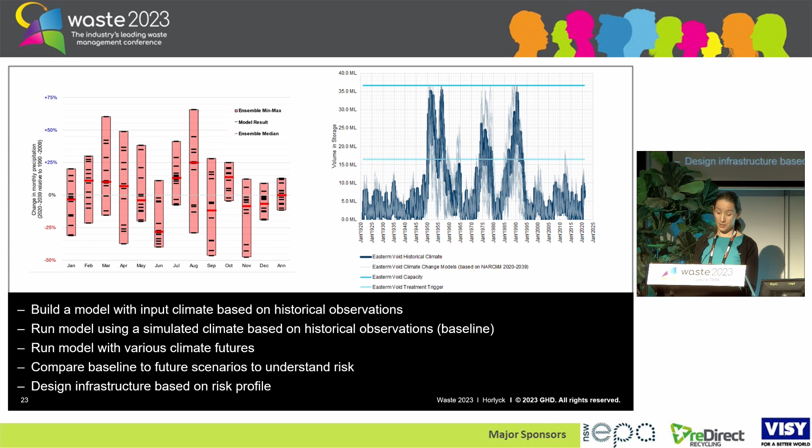So what are the lessons learnt? Contingencies may not be available during extreme weather events. Roads might be flooded, tankers might be unavailable, and your existing disposal mechanisms might not be available.

Existing site plans aren't always followed or fail to deal with these extreme events adequately. Existing modelling may fail to account for all sources during these extreme events, or assume those increases are linear, when really they're not. And when looking at capping, consideration of future leachate disposal costs isn't always included.

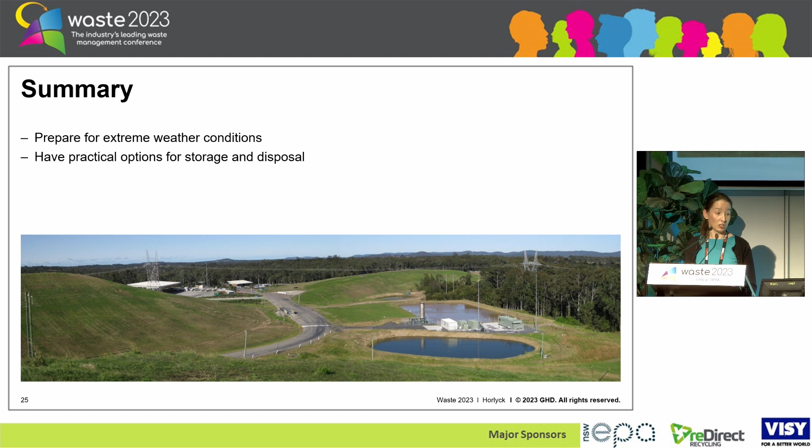So, in summary: prepare for extreme weather conditions, have practical options for storage and disposal, and consider climate change. Thanks.

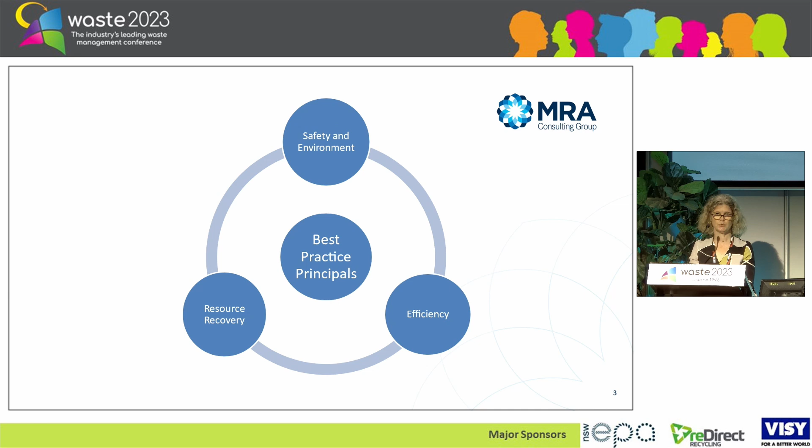We're going to talk about transfer stations. This presentation aims to provide useful and practical advice to improve the design and operation of waste transfer stations toward a best practice standard. There are six elements we'll consider: safety and risk management, environmental management, sustainability, resource recovery, efficiency, and value for money. MRA came across three elements for best practice landfill and transfer station operation—safety and environment, efficiency, and resource recovery—feeding into best practice principles. We visited nine sites in Tasmania, took along a site checklist to survey the operations, made an assessment, analysed the results, identified priority actions, and developed recommendations.

The first major component of best practice is safety and environment. In a transfer station, it's important to separate visitors and operators—it's often a shared environment, so it's important to ensure there's a safety separation between the actual operations of the transfer station and the visitors coming in. There are also ways of preventing harm operationally through drills, supervision, and improvements to site conditions. There may be ways to establish infrastructure prevention, such as a leachate capture system, conveyors, or fire suppression systems. It's also important to ensure access to emergency services, firefighting, drinking water, first aid, and training for first aid and first response. In all these matters you're likely to be guided by regulations, planning approvals, and the licence obtained for your transfer station. We also have a list of human health and environmental concerns, such as fire, air emissions, hazardous waste, falls, traffic, noise, leachate, stormwater, litter, and ecology.

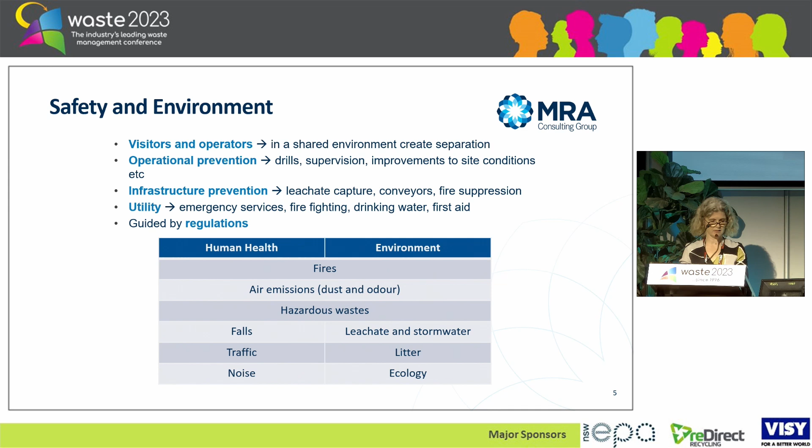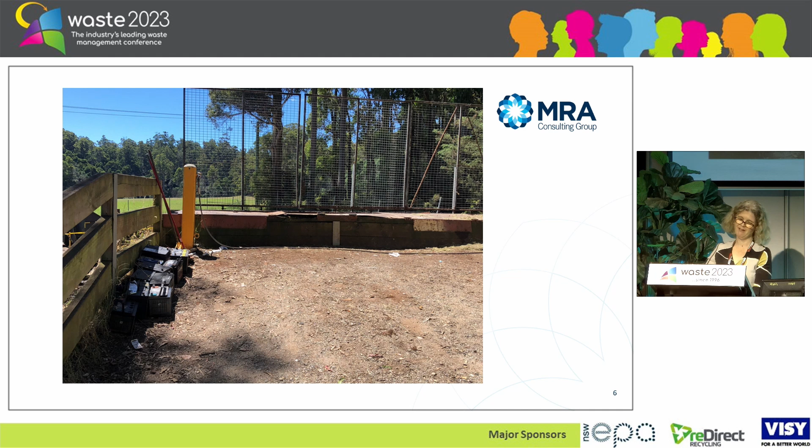This site, in contrast, is much better. It's got a hard stand, it's got a cover. At the back there's a barrier to the tipping of material, there's better signage, and there's attendant personnel there. There's a bit of junk on the side that could be removed to better facilitate operations, but overall much better operations at this site. I think the point in all this is that for design for safety and environment, small changes can lead to big improvements.

The next element of best practice we looked at was resource recovery. This is a site-by-site approach. There may be some core materials that most transfer stations will take, listed there, and some expanded materials—not everybody takes the same materials depending on site, location, staffing, and funding. The key is to prioritise recycling. There should be obvious drop-off locations, a unidirectional flow of traffic, an incentivised pricing scheme, and good signage to encourage recycling. If there is a resale shop, one should pay attention to making the presentation attractive and to good management of materials there. Some transfer stations may receive materials that could be mulched, crushed, or baled, encouraging size reduction and better management of materials. This is a site we had a look at—we did this concept plan for the Devonport Resource Recovery Facility.

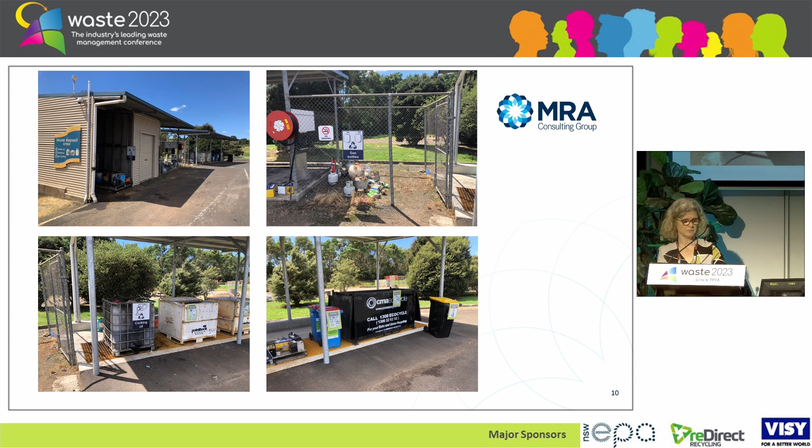The third element for best practice we looked at was efficiency and value for money, broken into 3 segments. Financial efficiency may result from adopting a user-pay system where weight-based billing is incorporated. It may have additional capital expenditure which is recovered during operational savings. Traffic management could be improved, as I said before, by unidirectional flow and easy access for emergency vehicles. Data collection is possible via weight-based billing, and also there could be a toll booth, which improves reporting mechanisms. The automation of data reporting can be used for cost modelling also, and the avoidance of the levy.

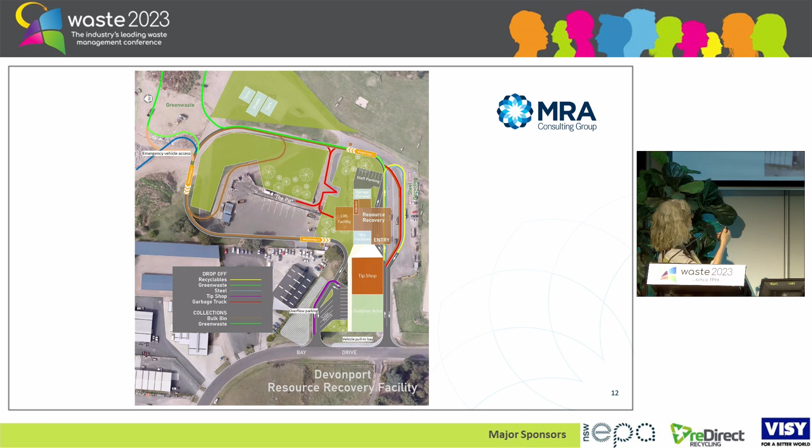So we're back to our transfer station here, and you can see there's been some additional weigh bridges installed for data collection. There's an emergency entrance up here, a designated entrance for emergency vehicles, and as I mentioned before, the unidirectional flow of traffic improves efficiency around the site.

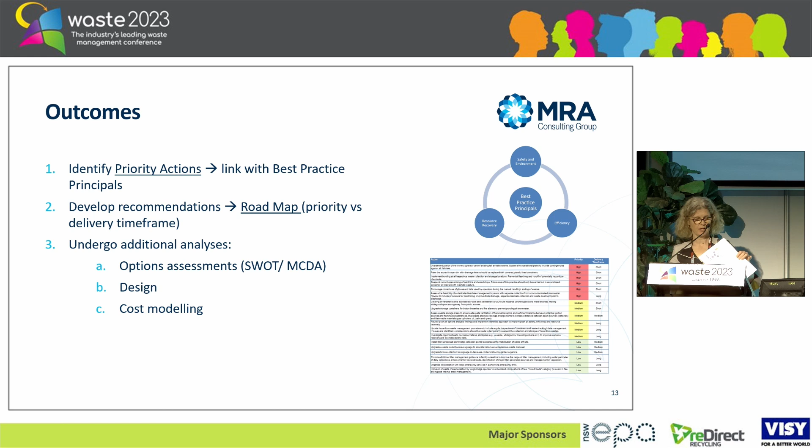So our project then developed a checklist, an example of which is at the bottom of the page. Using the checklist and best practice principles, we developed priority actions, which were classified into high, medium and low priority with a short, medium and long time frame. Using those, we could develop a roadmap for the transfer station improvements and undergo additional analysis if necessary, such as cost benefits, cost modelling, SWOT analysis, or multi-criteria decision analysis. Then we could develop the design further.

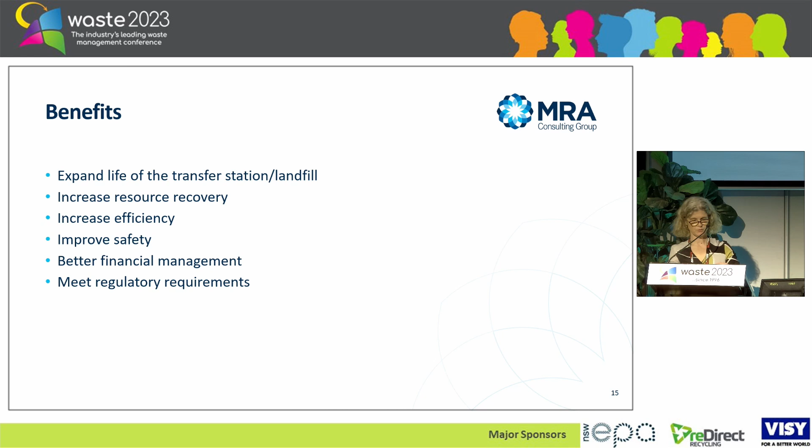So some of the benefits of this approach would be to expand the life of the transfer station or landfill, increase resource recovery, increase efficiency, improve safety, and achieve better financial management. Thank you.